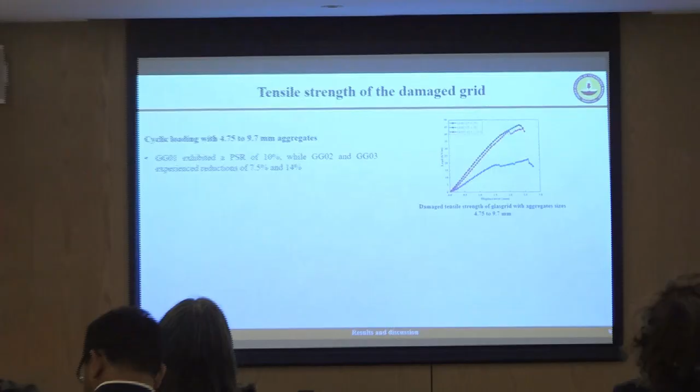It signifies that once the cyclic loading is completed with different ranges of aggregate, we have quantified its tensile strength. As I have already said, we are using three different ranges of aggregate for three different grids. In the first set of experiments, we used smaller aggregate having a size of 4.75 to 9.7 mm. We noticed that for the GG1 grid, the percentage strength reduction was 10%, while for GG2 and GG3 grids, the strength reduction was 7.5% and 14%.

In the next set of tests, we used aggregate size of 13.2 to 19 mm, and we observed that for the GG1 grid the percentage strength reduction was 18%, while for the other two grids it was 14.5% and 24%.

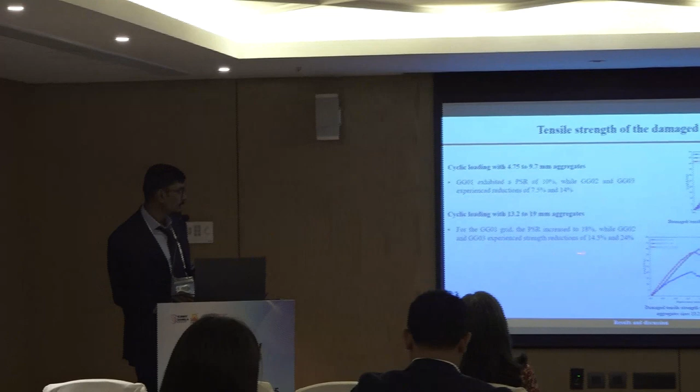Similarly, with the coarser aggregate having a size of 19 to 25 mm, we noticed that the percentage strength reduction was quite high. The percentage strength reduction for the GG1 grid was 30%, while for the other two grids it was 25.5% and 38%.

It is interesting to note that for the GG3 grid, which has a smaller aperture and higher number of yarns per unit width, in all three cases the percentage strength reduction was quite high. For instance, with this size of aggregate, the strength reduction was very high at 38%, and for the other two cases it was also significantly high. This shows that in addition to aggregate size, grid aperture does matter in terms of strength reduction. The strength reduction in the third case was quite high because the aperture size is very small, so when aggregates are used over it, they actually damage the yarns.

This shows that due to these damages, when we do the tensile test, the upper yarns which are damaged will move, resulting in reduction of tensile strength. In addition, minor damages that affect the yarns to some extent cause non-uniformity in the stress distribution. Whenever there is non-uniformity in stress distribution, the chance of distortion in the grid will be higher and the tensile strength will reduce.

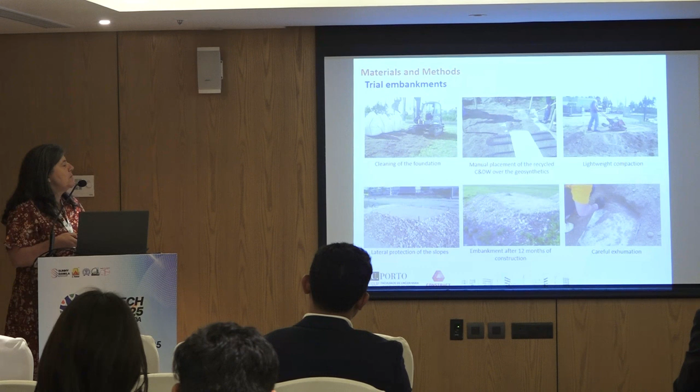After 6, 12, and 24 months of the embankment's construction, the samples were carefully exhumed to avoid any kind of additional damage. Laboratory installation damage tests were also carried out.

We used a laboratory prototype developed at our University of Porto, composed of a steel box 300 millimeters square. This box is filled with, in this case, the recycled material, and the geosynthetic is placed at the middle. Dynamic loading with amplitude ranging from 5 to 500 kilopascals at a given frequency, for 200 cycles, was induced in these materials.

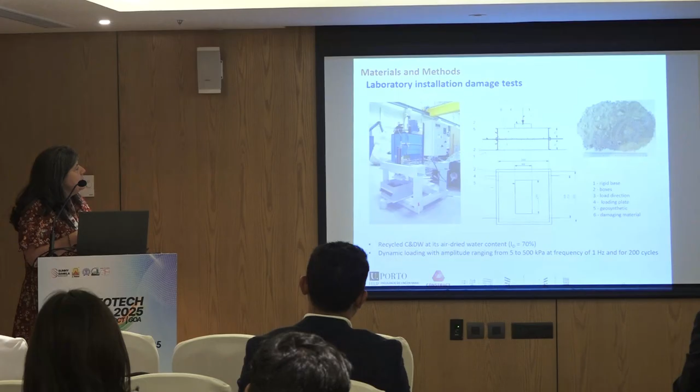Then we also performed tensile tests. The tensile tests were performed on intact specimens as supplied by the manufacturer.

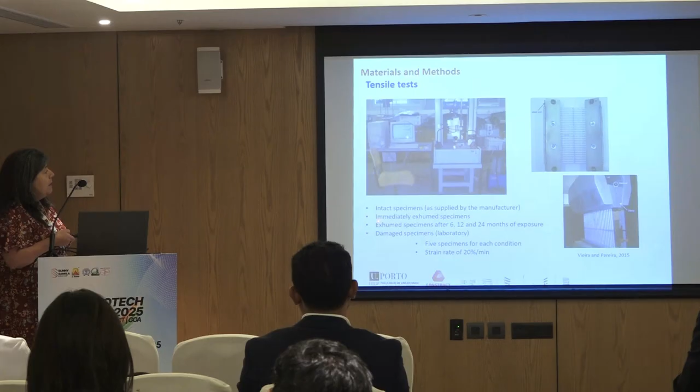We also performed tensile tests on immediately exhumed specimens to isolate the effect of the construction of the embankment from that of exposure to the fill materials. Tensile tests on specimens exhumed after 6, 12, and 24 months of exposure were also carried out, and also for damaged specimens in the laboratory. For each condition, 5 specimens were tested, at a strain rate of 20% per minute.

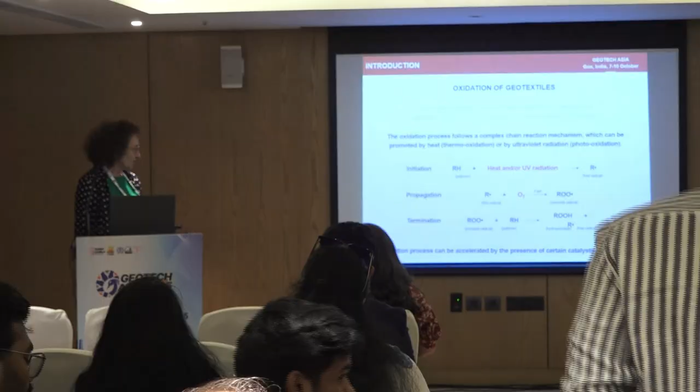My presentation is about the effect of metal ions on the thermal oxidation of geotextiles made from high density polyethylene. The oxidation of geotextiles can compromise the performance and lifespan of geosynthetics. This oxidation can be promoted by heat and by UV, and can also be accelerated by the presence of certain catalysts, such as metal ions. The main goal of this research is to study how metal ions of copper and iron affect the thermo-oxidation process of high-density polyethylene geotextile, and compare the results with those of PP geotextiles.

The experimental procedure: first we used a woven geotextile with HDPE filaments, then we degraded it with metal ions and thermo-oxidation, and finally studied the reduction in tensile strength. We took two geotextiles with similar tensile strength and deformation at rupture.

The degradation test first exposed the geotextiles, and then we made successive exposures to the two degradation tests: immersion in metal ions and thermo-oxidation. For single exposure, we used copper and iron nitrate at given concentration, temperature and time, followed by thermo-oxidation under these conditions: 150 degrees temperature, and 14, 28, and 56 days. Finally, for successive exposure: copper nitrate, iron nitrate, and thermo-oxidation.

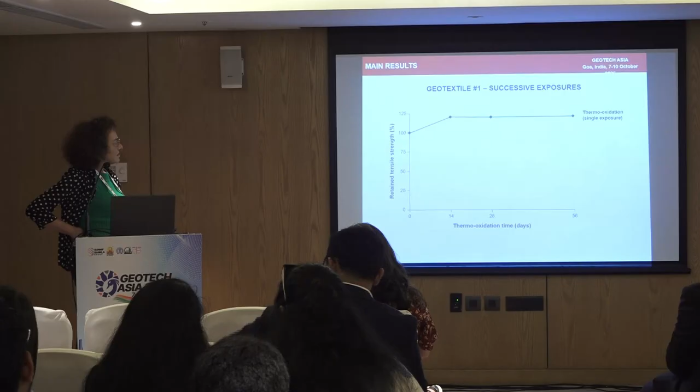In successive exposures, we see that copper nitrate had no influence on the thermo-oxidation resistance, and iron nitrate also did not influence the oxidation process of geotextile 1.

Finally, we can say that the isolated action of the metal ion solution did not result in a noticeable change in the tensile behavior of HDPE geotextiles. On the other hand, we noted change when those geotextiles were submitted to thermo-oxidation tests, which increased the tensile strength and elongation, and reduced stiffness. The successive exposure to metal ion solutions and thermo-oxidation did not cause additional change for the HDPE geotextiles.

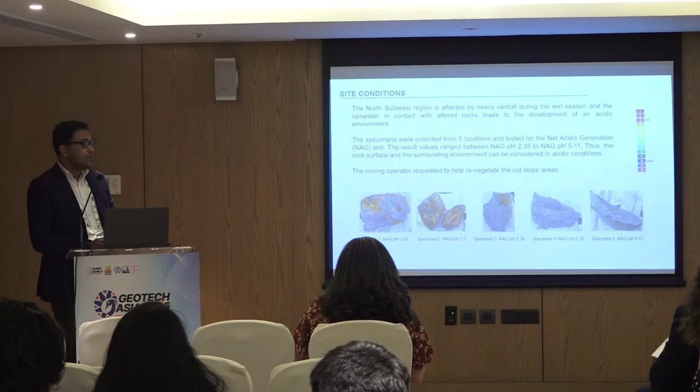So the mining operator tested the soil, taking 5 samples from the site, and tested them for net acidic generation. The results showed that the material and rock at the site had pH ranging between 2.35 to around 5. So we can say we are in quite acidic conditions, and the target was to revegetate the slope.

The steeper the slope, the higher the performance needed from the geomat placed to enhance and foster vegetation growth. In this case, we followed the Indonesian standards. We explained to the operator this is usually related to the soil terrain. However, the operator wanted to challenge the effectiveness of a solution proven throughout Indonesia, also for their mining environment.

As I mentioned, we went with a reinforced geomat because of the considered steepness of the slope, reinforced with double twisted steel wire mesh. Steel exposed to an acidic environment is prone to corrosion, so there was a requirement to provide advanced coating to the steel wire mesh for protection.

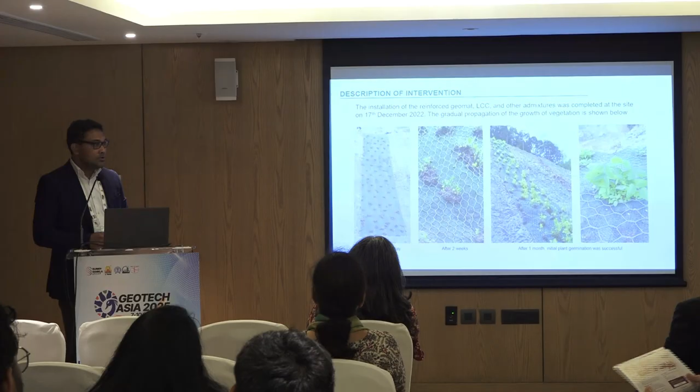We went through different laboratory tests. The first was to check for any variation in the thickness of the steel wire mesh, comparing it to the virgin, just-out-of-factory material. Based on our check, we found no difference or reduction - no red rust outside the coating - meaning there was no reduction in the thickness of the steel wire mesh.

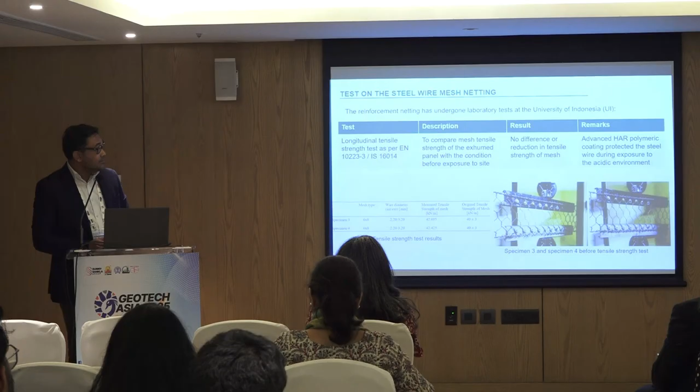Let's look at the second aspect, related to the performance of the netting, not just a single steel wire. We checked following international standards - in India there's also the Indian standard IS 16014, recently released, with an update in 2014. We checked the longitudinal tensile strength and found the results from the exhumed material in line with the values recorded for fresh material. So there is no difference or reduction in tensile strength, thanks to the coating that protected the steel wire.

To conclude - 9 minutes, right? To conclude, when we deal with challenging environments like gold mining, where infrastructure needs to be long-lasting because we're talking about people who go there, people need infrastructure that protects them and also protects the infrastructure at the mine. We need to consider long-lasting solutions in mind.

We also need to minimize the mining operations' impact. To protect the workers, we need to consider advanced coatings as I mentioned, which can also be used in collaboration with soil nailing if the slope is not stable - combining netting with soil nailing to stabilize the slope. Then there's durability - one professor earlier asked about design life, what the performance is after 30, 40, 50 years. That aspect is also definitely to be considered.

With that, I would welcome any questions from your side. Thank you.

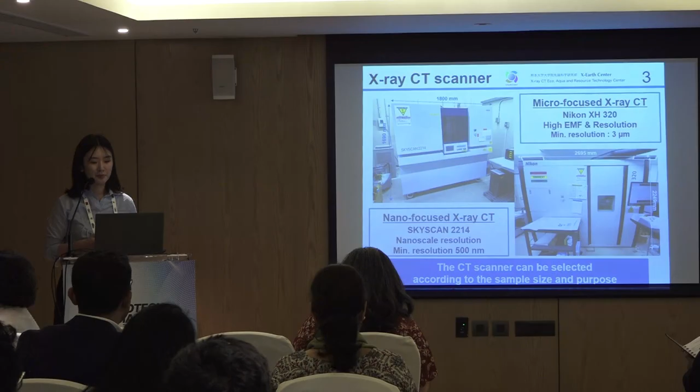Based on this background, the objective of this research is to evaluate the barrier performance of GCL by visualizing the freezing characteristic of bentonite and the microstructure changes in GCL after freeze-and-thaw using X-ray CT scanners.

In the next slide, I will introduce the X-ray CT overview and properties of our study. In this study, we separately scanned a frozen clay sample and GCL under freeze-and-thaw cycles. First, for scanning the frozen clay sample, we scanned kaolinite to clarify the freezing characteristic of bentonite. We used the freezing stage of nano X-ray CT to scan the specimen with a diameter of 6 millimeters.

Next, we scanned GCL under freeze-and-thaw cycles. Since GCL was cut into a disc with a diameter of 50 millimeters, we used micro-focused X-ray CT for the scanning.

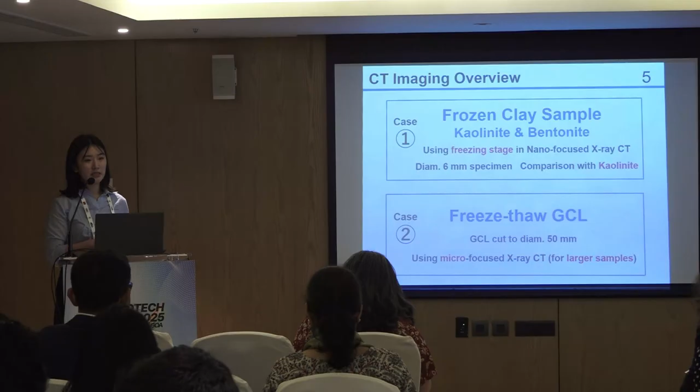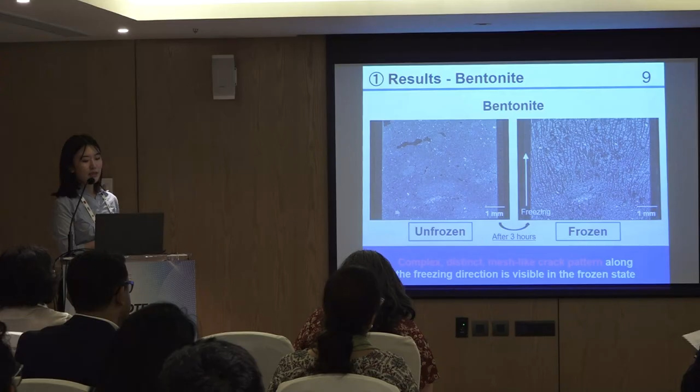Here are the results for bentonite. After freezing, bentonite showed complex mesh-like ice lenses along the vertical freezing direction, in contrast to the layered ice lens pattern observed in kaolinite.

Bentonite has high swelling and water retention properties, which are considered to be the main reason for the differences between bentonite and kaolinite when frozen. During freezing, these properties restrict the movement of water, which is necessary for ice lens formation. As a result, it can be said that complex ice lenses develop vertically within the bentonite.

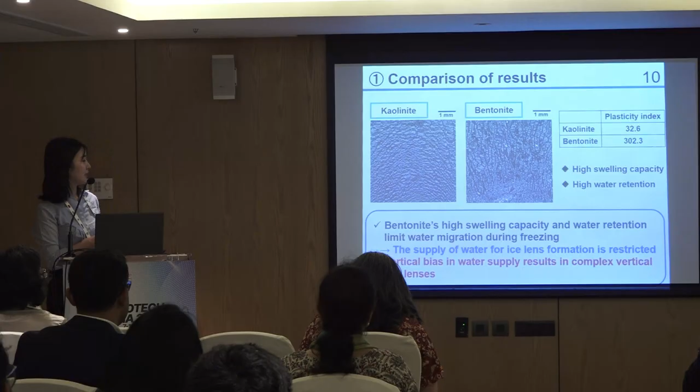Next, I'll show you case 2, the GCL under freeze-and-thaw cycles. First, I will explain the freeze-and-thaw method. Since micro CT doesn't have a freezing stage like nano CT, we developed a freezing and thawing device with thermal insulation to prevent the GCL from thawing during scanning.

Freezing was carried out at minus 16 degrees Celsius, same as in the nano CT observation, and thawing was conducted in a room maintained at 20 degrees Celsius. In our preliminary experiment, we measured the internal temperature of the GCL and found that each freezing and thawing process required about 12 hours, so we ensured at least 12 hours for both freezing and thawing process in this case.

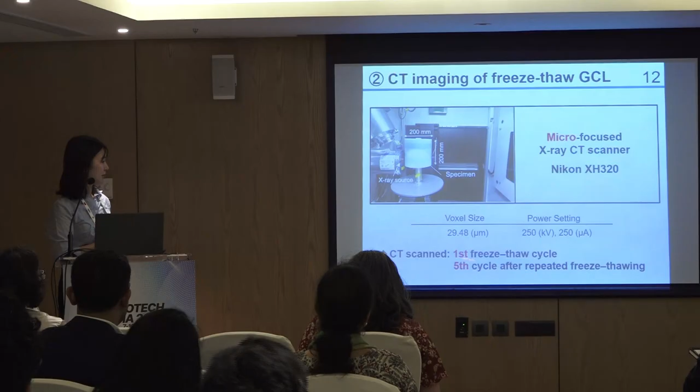These are the result images of the GCL after the first freezing and first thawing. This part is the non-woven cover geotextile, here is the woven carrier geotextile, and these are the needle punch fibers.

Here are the images after the fifth freezing and fifth thawing. From the first to fifth freezing, the frozen GCL showed a distinct ice lens pattern along the vertical freezing direction, similar to the micro X-ray CT results.

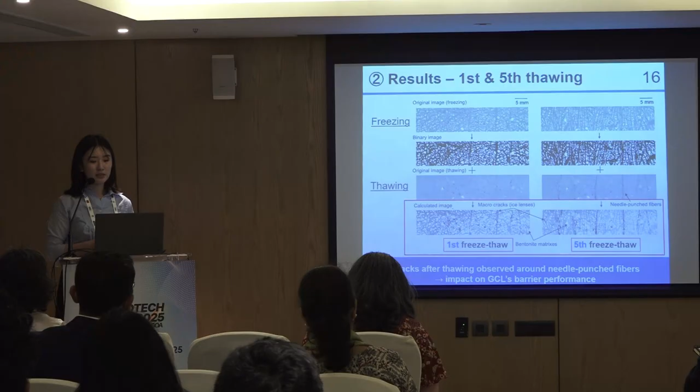Furthermore, after thawing, the cracks were clearly visible along the needle punched fibers. These cracks are expected to have a deep impact on the barrier performance of GCL.

Finally, here is the conclusion. When bentonite freezes, ice lenses develop in the vertical freezing direction. This unique characteristic of bentonite remains as vertical cracks in GCL after the freeze and thaw cycles, which could provide a pathway for fluids and other chemical solutions.

I'd like to close my presentation. Thank you so much for your attention.

Thank you, Nana, for your presentation. Any questions, please? Thank you for the presentation.

So the geotextile we use is the needle punch geotextile. If I'm not mistaken, the fibers are kind of aligned vertically after freezing. Why do you think the fibers just line up vertically like that?

Thank you so much for your question. I think needle punch is very important for the strength of GCL, but in this case, in my opinion, there are local gaps around the needle punch fiber. That's why the cracks remain. So maybe to improve this situation, we need to consider the intervals or placement of the needle punch.

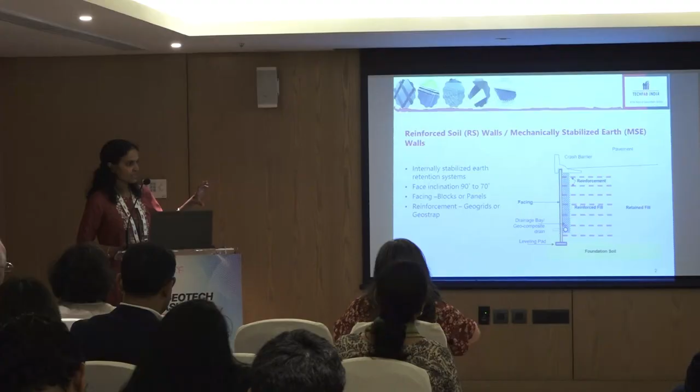While designing the reinforced wall, these are the main components we consider: there will be a reinforced zone, then the retained fill zone, and facing. The facing will be supported on a leveling pad, then the foundation on which the reinforced wall is standing, and the pavement above.

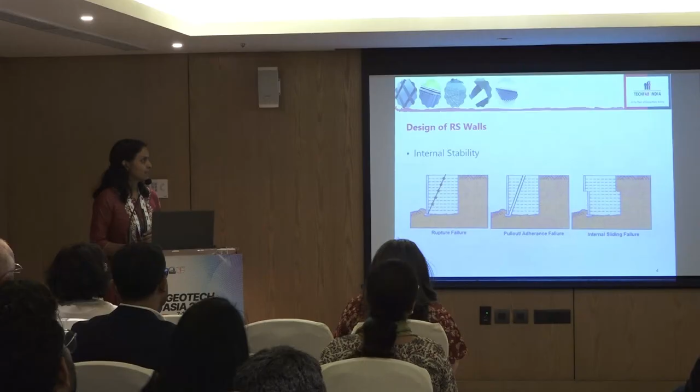While designing RS walls, we generally consider external stability and internal stability. In external stability, we consider the reinforced zone as a solid block, and we check for stability against sliding of the wall, bearing capacity of the block, overturning stability, and limiting eccentric stability. In internal stability, we check for rupture of the reinforcements, pull-out failure of the reinforcements, and also internal sliding in between the reinforcements.

There are actually two main methods currently used for designing RS walls. Up till now, we have been using the allowable stress design method, which is mainly used in AASHTO 2002 code and also IRC SP 102 code. But currently, since all other designs are moving towards load resistance factor design, also called LRFD design method, the new IS codes are also recommending LRFD method for the design of RS walls.

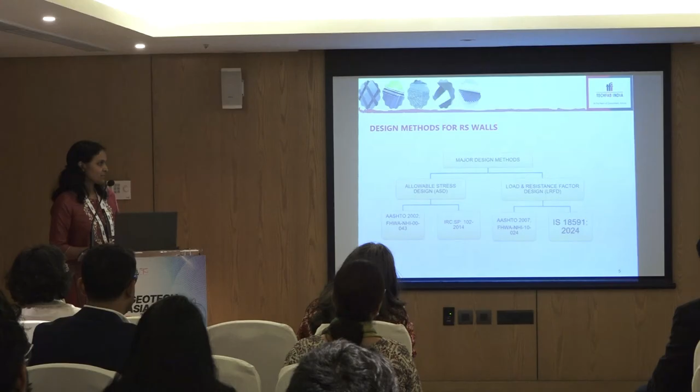So we use sheets for providing the design of RS walls. Up until now, we were using designs based on IRC guidelines, and now we are moving towards the LRFD design. I just thought of comparing both the methods using standard software. So in brief, to compare both methods: in ASD method, the allowable stress method, we check the internal and external stabilities using non-factored loads, then derive the factor of safety for each failure mode, and then design the RS walls.

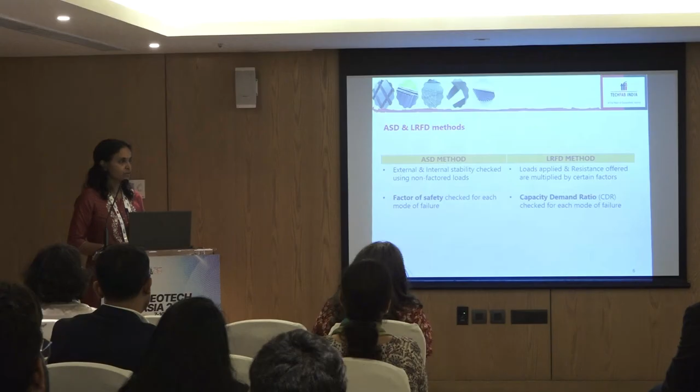In LRFD methods, the loads are increased by some factors, and the resistance offered by the soil and reinforcement are reduced by some other factors. We check a factor called capacity demand ratio, CDR, and it is ensured that for each mode of failure, the CDR value is greater than 1.

In ASD method, we use different factors of safety for sliding, bearing failure, eccentricity, and for internal stability we use factor of safety for rupture, sliding, and pull-out. Whereas in LRFD method, for each of these failure modes, we derive factored resistance versus factored load ratio, and it is ensured that this value is greater than or equal to 1.

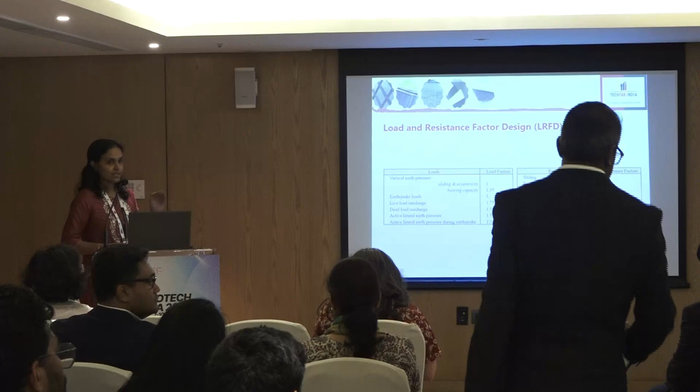I used commercial software MSEW for comparing the designs of LRFD and ASD methods. I did a parametric study for different heights of the RS walls for 2 types of arrangements: blocks and geogrid arrangement, and panel and geostrap arrangement.

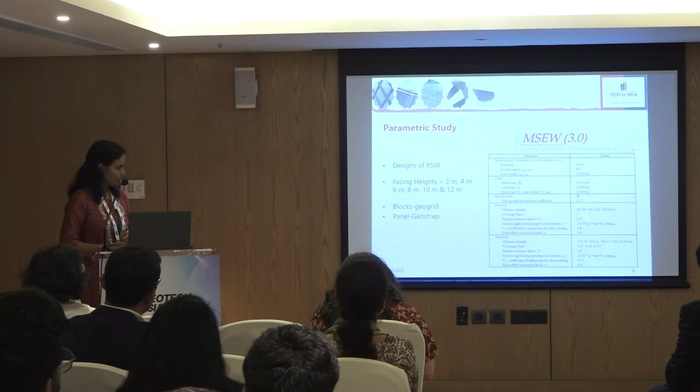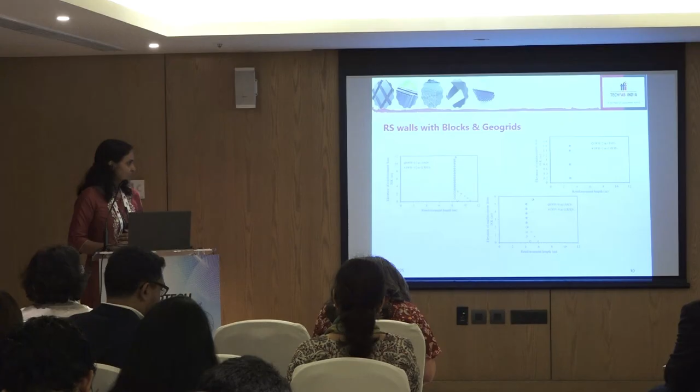This is because in block geogrid arrangement, we observed that direct sliding is more critical in failure, in internal stability. In direct sliding, in LRFD method, for lateral earth pressure we are providing a factor of 1.5, whereas for vertical load we are providing a factor of only 1.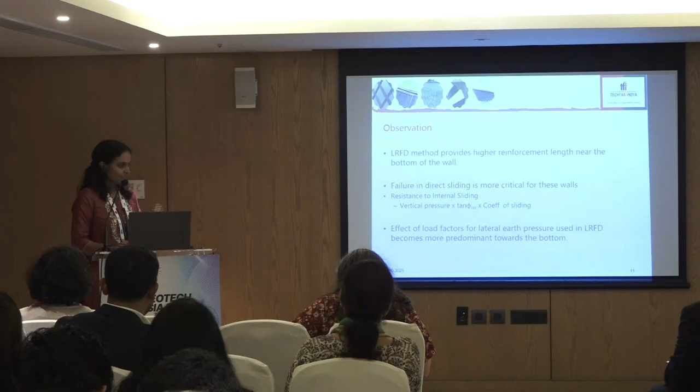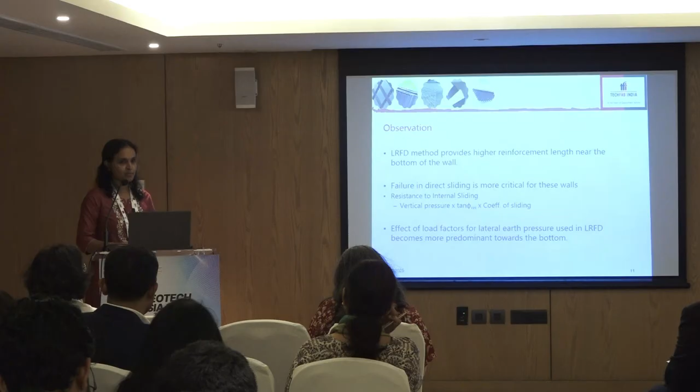Because of this, towards the bottom of the wall it becomes more critical compared to ASD method. Hence, LRFD method is demanding more length towards the bottom of the wall.

We can see that the lateral earth pressure increases with depth of the wall. In direct sliding, the vertical loads have a load factor of only 1, whereas the lateral loads are magnified by 1.5 times, whereas in ASD method we are not multiplying it by any factors. So LRFD method is demanding more length towards the bottom of the wall.

Now in panel and geostrap, we observed that for all the heights, both methods are demanding almost the same length of the reinforcement.

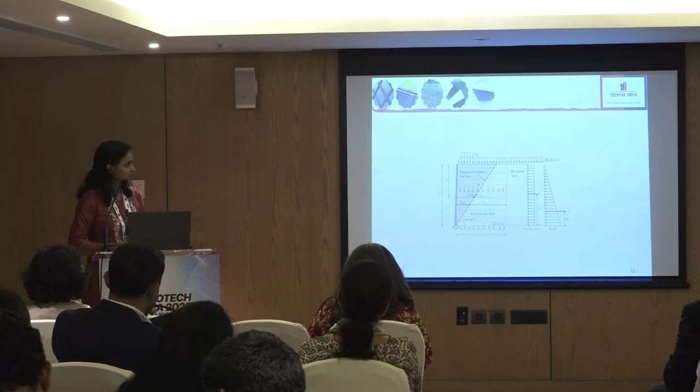This is mostly because in geostrap and panel, the most critical failure mode is pull-out failure of the strap, which is more critical towards the top of the wall, because the length of the geostrap towards the top should be higher, since for resisting the pull-out failure, we need to have only this much portion contributing to the resistance of pull-out.

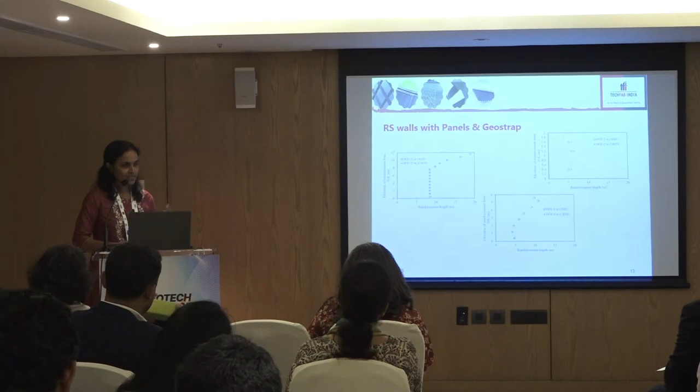Since the pull-out resistance is calculated as the vertical pressure on the reinforcement multiplied by the coverage ratio of the reinforcement and the length in the resistance zone, it is dependent on the vertical loads. Hence, there is not much difference in the results between the ASD and LRFD methods.

In summary, both ASD and LRFD methods require similar reinforcement strength. However, in geogrid block arrangement, more length is required towards the bottom of the wall in LRFD method, and in geostrap panel arrangement, similar lengths are required from both methods. That's all from me. Thank you.

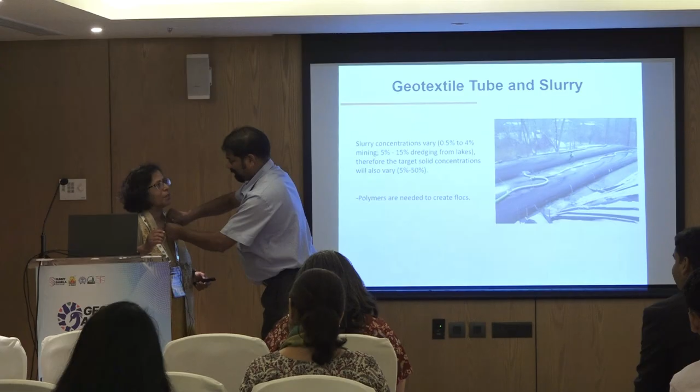To give an idea of what a geotextile tube is - it looks like a long flat sausage. They can be 100 or 200 feet long, with a diameter the size of this room, and they vary in size depending on the project's needs. Sometimes you need hundreds of tubes, sometimes just 2-3 tubes to dewater sediment.

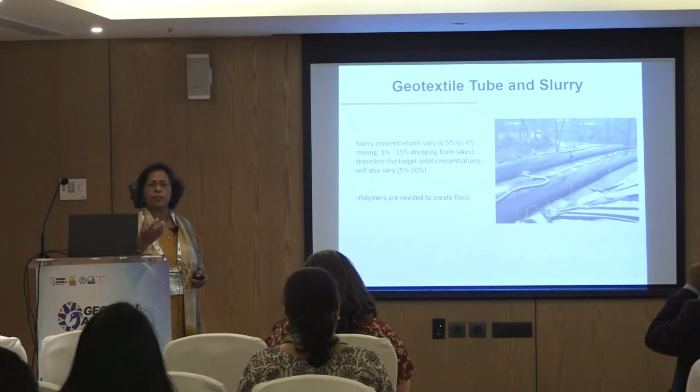Why do we need to dewater sediment? There are many applications - whether a port, a lake, or near a river - where sediments accumulate over time and need to be removed to reduce quantity. Sometimes they're taken to landfill, sometimes they can be reused. Sediments dredged from water bodies can have very small solid content, 2 or 3%, particularly in mining, and when removed from lakes, can be 5 to 15% in quantity.

For the last 15 years or so, we have been involved with industry working on many different types of sediments. In the first example, these aren't really sediments - it's a pond where a rubber or glue company has been depositing waste, with very small particles, very low specific gravity, and low solid content.

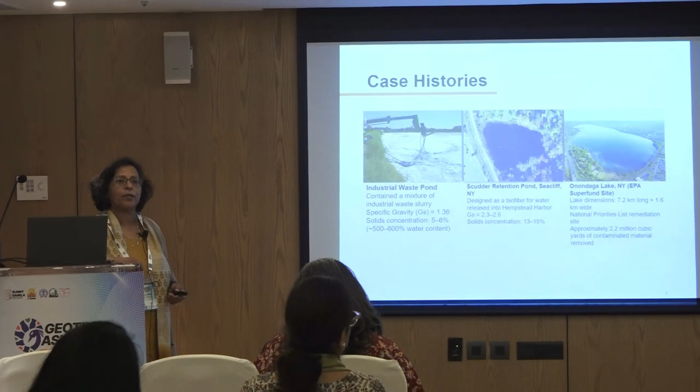In the middle you see a pond in a New York City residential area. A lot of sediment accumulated there and needed to be dredged so the water could regain its capacity, and here the sediment solid content is almost 13 to 15%.

The last example is a very large lake in Syracuse, the city where I live, where the sediments are highly contaminated and highly variable, with a lot of organic and clay content. Each project can be very different, and in practice, when removing these sediments, they generally don't perform any geotechnical testing - they just take the slurry, mix in different polymers, and try to see how they can dewater the sediments.

So we worked with a company who provided us sediments from 15 different water bodies in Canada and the US, highly variable in nature.

We combined 5 standard sediments, Ottawa sand, very fine sand, some tailings from the local area, kaolinite, and organic material, and tried to understand if the physical and chemical properties of these sediments have any relationship with the amount of dewatering we can do.

It was very ambitious because this is not generally what industry is doing. Credit goes to George and many other undergraduate students, because they did all these specific property measurements: specific gravity, grain size distribution, particle shape, organic matter, specific surface area, and chemical properties of these 20 sediments, ranging from pH to zeta potential and particle charge density. So we had a lot of physical and chemical properties to really know the nature of the materials.

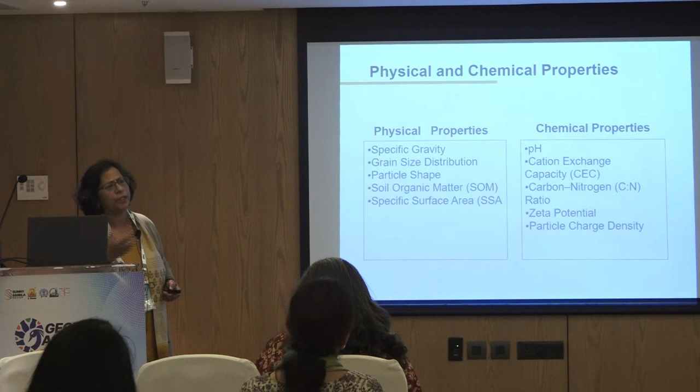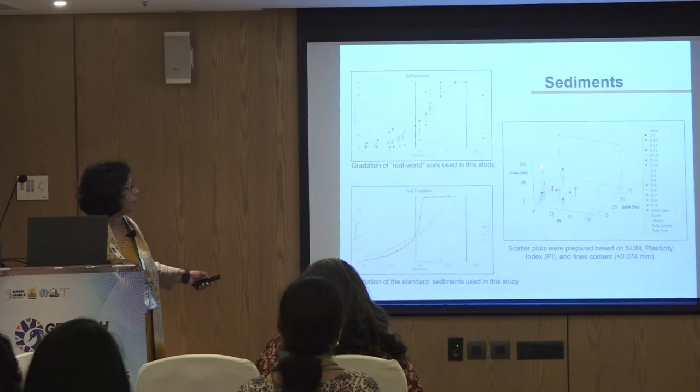Here is the range of particle size distribution - these lines may look low, but you can see they have a wide range in particle size. When we look at this chart in the middle, PI is plotted here, fine content is plotted here, and percentage of organic materials is plotted here. This is the scatter of all the sediments we are testing from many different water bodies.

Generally these sediments have a significant amount of fines, and when pumped into tubes - which are quite open, woven geotextile - they need to be flocculated, otherwise a lot of fines will come out. So in about 99% of projects, polymers are added, typically polyacrylamide, ranging from cationic to anionic. We selected a number of polymers and for each sediment found the best polymer which can make the particles lump together and flocculate. Now you have a larger particle - not a particle anymore, it's a floc - which can be retained on geotextile when we dewater.

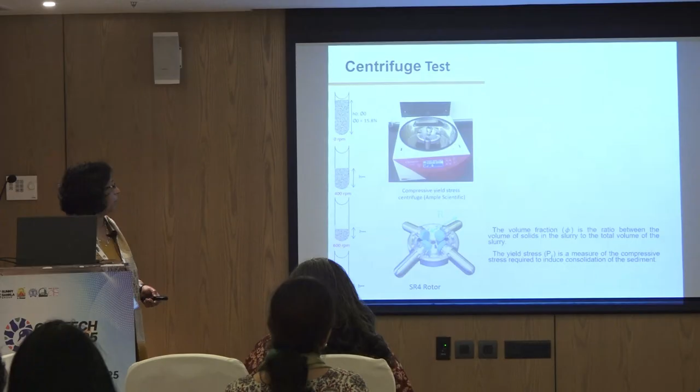One of the tests we developed over time is called the centrifuge test. This is a very standard test used in chemistry or chemical engineering, where you take a small bottle of slurry, put it in the centrifuge, and rotate it at very high frequency. Afterward, as the height decreases, the sediments are consolidating, and you measure the consolidated height. From that, we predict what the solid content will be.

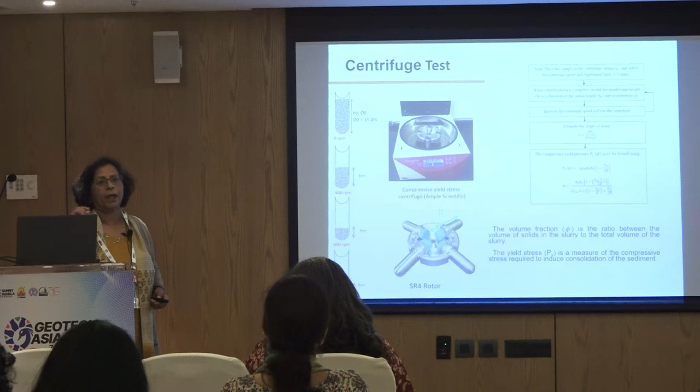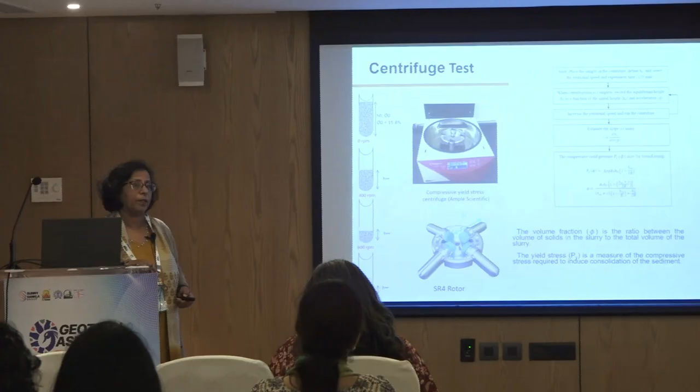Here I show results for the standard 5 soils: kaolinite, organic silt, two fine silt sediments, and Ottawa sand. You can see as particle size increases, these curves shift, meaning that after dewatering, if we start all sediments at 10% solids, sand will dewater to a very high percentage - almost 60% solids. Whereas kaolinite, after centrifuge dewatering, will only reach 35%. But we have to run the test to know that.

One important thing to look at is what we call yield stress, Py, which gives an idea of the final solid content. You can relate this Py value to the percentage solid - this is called the gel point. I'll show some data about gel point, which is what industry needs in the field, when they bid for a project and get a slurry, they need to predict what solid content will be achieved.

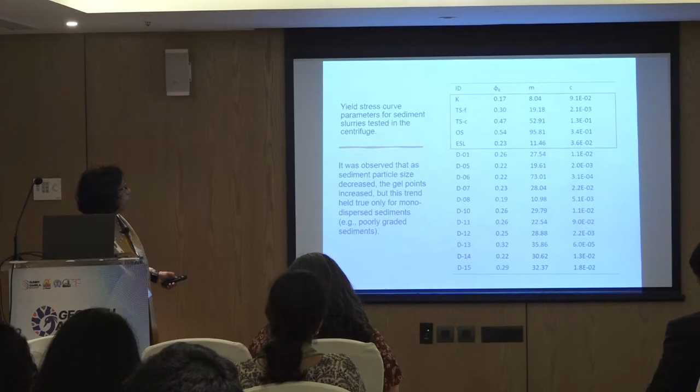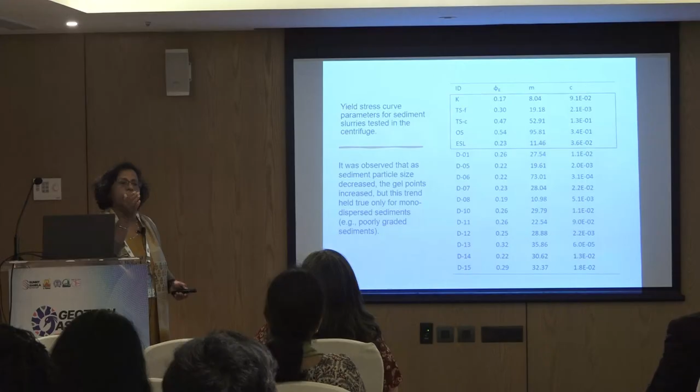Here is the test data for all these 25 or 50 sediments, where we don't even know the nature of the sediment beforehand - they vary widely. Using this equation and looking at yield stress versus slope, we make a clear observation: as the fine content in the slurry increases, the yield stress changes as a function of that. We found that the important parameters are really D10 of the solid and specific surface area, both interrelated - finer particles give us this equation, which we came up with from a large amount of data. These are measured gel points from the centrifuge test, and these are calculated values, showing a reasonably good relationship.

How can we use this? What is the value of that?

If we know the D10 grain size distribution and specific surface area, these are simple tests to perform, and using this value we can estimate what will be the gel point or percentage solid in the field without doing a large scale test.

In this test study, we measured many chemical properties, but most had no relationship with solid content. They definitely affect the type of polymer we select and the amount of polymer, but nothing to do with solid content. They were more related to the physical properties of the material or sediments.

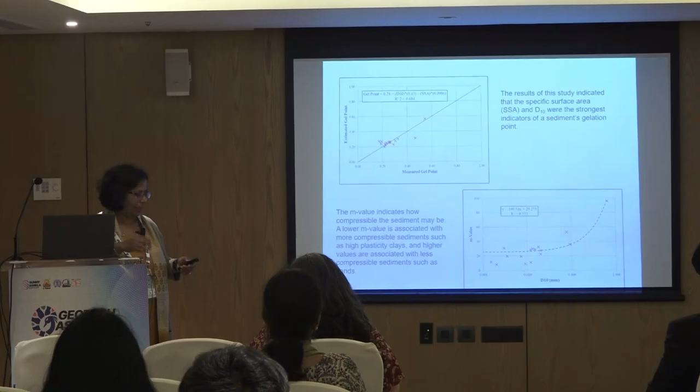So finally, the conclusion is organic matter, specific surface area, and fine content are important. We work with industry on very large projects, and they still don't measure these properties, but at least this gives an idea. Once you have sediment, you should pay attention to that, as many chemical properties had very little effect.

This conclusion is based on 20 sediments, but extensive testing was done. We were hoping we would find more relationship with chemical properties, but unfortunately we did not.

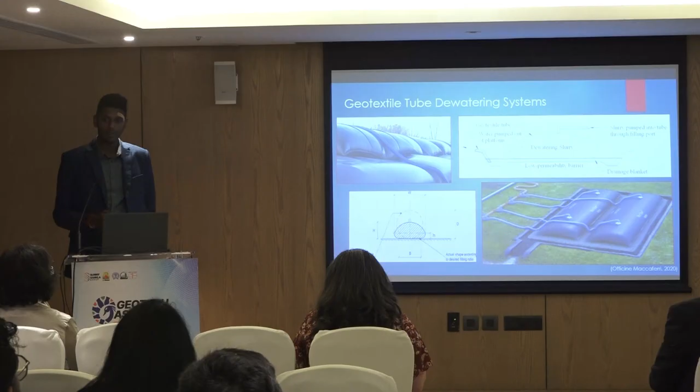So here's how they work. In the filling phase, fly ash is pumped directly into large, high-strength permeable tubes. Polymers are often added to improve particle separation and bulk up particle size. In the dewatering phase, water drains out through the fabric pores by gravity. Finally, in the consolidation phase, the material densifies into a stable, compact mass.

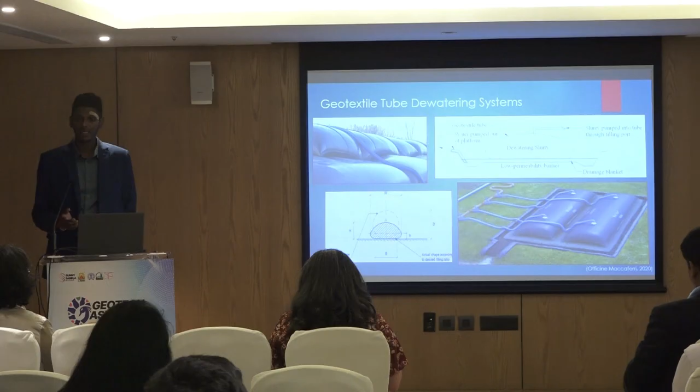So let's look at a few technical insights into this solution. Dewatering fundamentally changes fly ash. First, particle size and polymers: fines flocculate into larger aggregates, shifting the material towards well-graded silts or low plasticity fines.

Second, compaction. Dry densities of up to 1.2 to 1.6 tons per cubic meter and moisture contents between 18 and 30% make it viable for engineered fills and road sub-bases.

Third, shear strength and cohesion values. These range between 5 and 25 kilopascals, with friction angles between 18 and 30 degrees, on par with marginal soils, which allow for use in non-critical layers or confined applications.

Fourth, permeability, which is closely comparable to silts. It effectively limits leachate migration while aiding drainage control. These properties enable applications in sub-bases, lightweight embankments, blended cements (replacing up to 30% of Portland cement), and even flood defenses when integrated with geotextile tubes.

The geotextile allows water to drain while solids are trapped. To improve efficiency, polymers are added; they bind fines together into larger aggregates, improving retention and preventing clogging. Therefore, when we look at mechanisms of action, we speak about filtration and retention properties, hydraulic behavior, and the polymer conditioning involved in this solution.

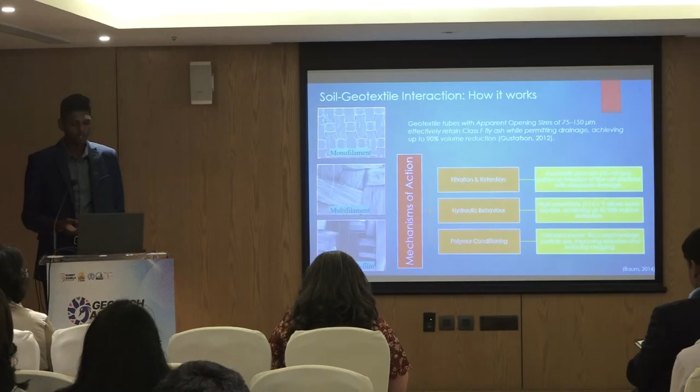Once filling starts, consolidation happens almost immediately, unlike ash ponds which can take up to decades. Stability depends on the design. Fabric resists pressure inside, friction holds stacked tubes together in place, and a prepared foundation prevents settlement or seepage. The main long-term risk is clogging, but this can be managed with the right polymers, as my previous speaker touched on. Finally, tubes must always be placed on an engineered pad with liners to stop leachate from seeping into natural grounds and meet regulatory standards.

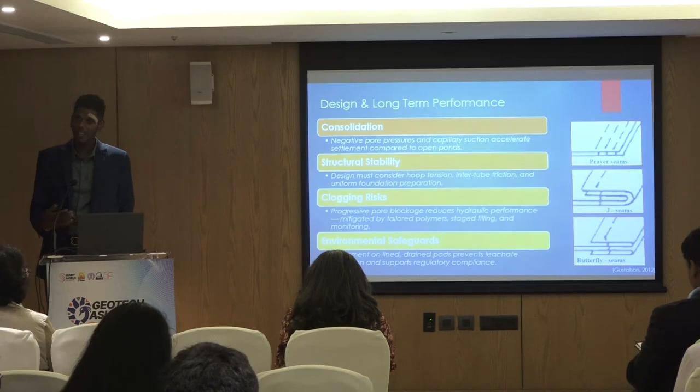Globally, fly ash is treated as a resource. Germany recycles over 60% of it into cement, roads, and embankments, while China reuses nearly 70% of it, mainly in bricks and soil stabilization. South Africa, by comparison, produces 30 million tons a year and buries over 90% of it. This study produced a roadmap for implementation, showcasing how this solution can be seamlessly integrated into tailings management systems, from lab benchmarking to pilot demonstrations.

So geotextile tube dewatering is more than just engineering - it's sustainability in action, reducing risks, recovering resources, and creating economic value. It directly advances the SDGs by turning waste into an opportunity and shifting us from containment to transformation.

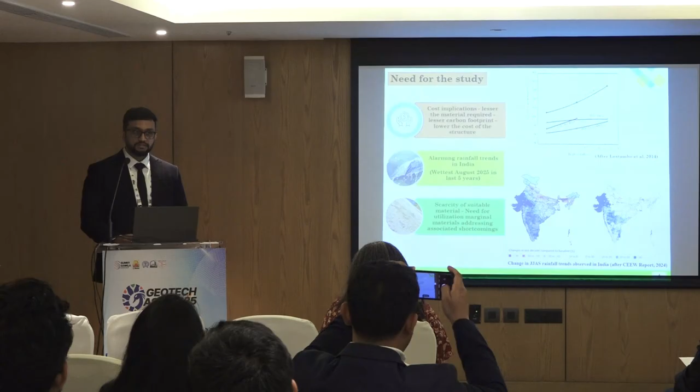The second point is the alarming trends of rainfall. If you observed, this August 2025 was the wettest August in the past 5 years, so rainfall trends seem to be changing. Comparing with the prediction from the last decade, there is a 30% increase in rainfall.

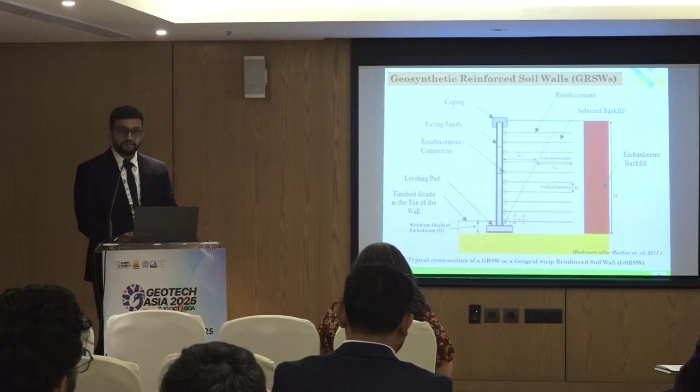One of the co-presenters has already discussed an RE wall in detail. I won't discuss much about it, but in short there are three important components of an RE wall: the fascia, the reinforcing element, and the reinforced fill or backfill. When talking about the reinforcing element, strips or strip reinforcement, we need to discuss the coverage ratio.

The relation between coverage ratio - the width of the strip to a specific horizontal spacing - has already been well established. But the recent Indian standard code has presented a different approach which is more site specific and more common to the field, where we have aspects like N and M. N is the number of connectors, and M corresponds to the number of strips coming out from a connector.

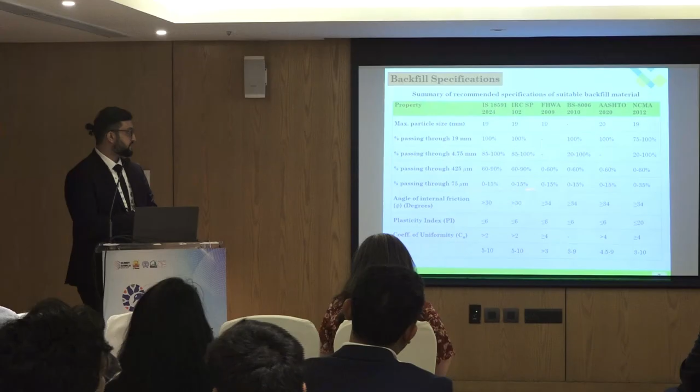So again, the three important aspects are fascia, reinforcing element, and backfill. I've just discussed the fascia and reinforcing element. These are the backfill specifications given by various codes, and in most cases our focus of interest is that fines should be 15% or less.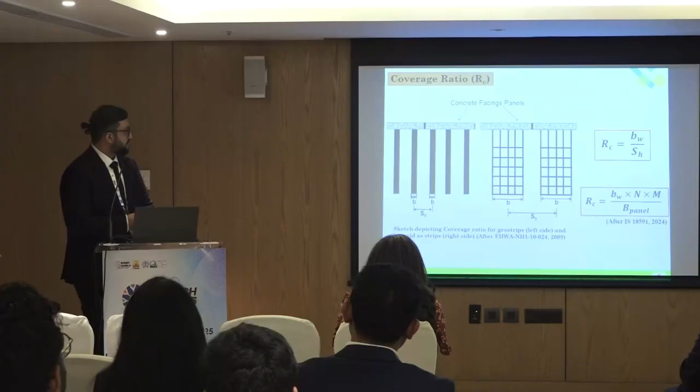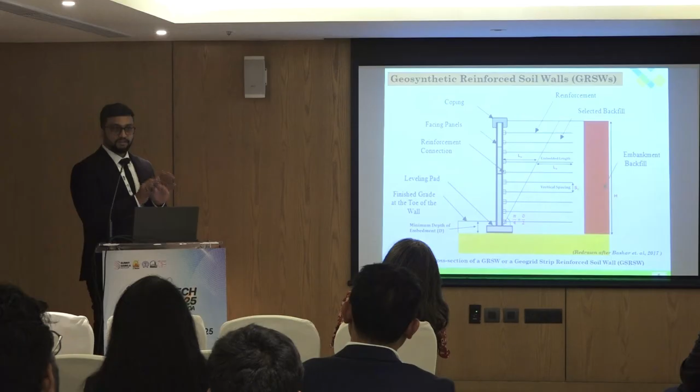One recent publication by Dasaka and Raghuram, 2024, used fly ash as backfill material, but they forgot to change the filter material - I don't know whether they forgot or just didn't update the design. There is normally a filter drainage material right behind the fascia, with a geotextile wrapping behind that, so water gets freely drained while fines remain in position. The AOS of the geotextile was not properly selected, so you could see fly ash material coming out through the spaces of the panel.

This is the National Geotechnical Centrifuge facility at IIT Bombay. Its capacity is 250 G-ton, and it's a large beam centrifuge with a radius of 4.5 meters. We can have a model area of 1 meter to 1.2 meters, or go up to 0.76 to 1.2 meters. Coming to the model test I conducted, these are the schema and specifications.

Fundamentally, when we do a centrifuge test, we need to focus on the scaling laws. We need to reduce everything in terms of a particular scaling law, whether it be rainfall, the geosynthetic material, the panel, the flexural strength of the panel, or the dimensions, everything needs to be scaled down.

It was already developed in our laboratory. Employing that, we tried to create a rainfall of 10 mm per hour, prototype rainfall. IMD says 10 mm per hour is moderate rainfall, so we tried to target that.

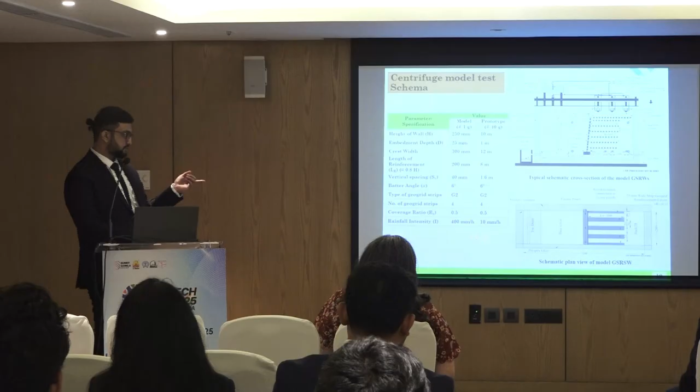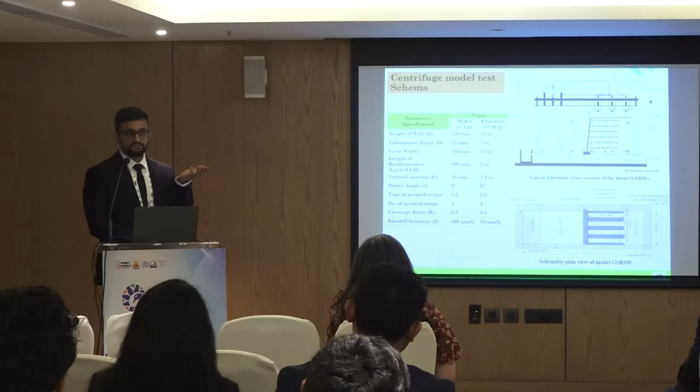Like I was saying, when we tried to find out the permeability characteristics, it's at 10 power minus 6, and the rainfall intensity is about 10 mm per hour. There is a parameter called I by Ks which defines whether the rainfall is being infiltrated or transferred into runoff. We want the effect of infiltration rather than runoff, so that's another reason we targeted 10 mm per hour.

There were previous tests done with higher intensity, but eventually most of it was runoff, it was not infiltrated into the body.

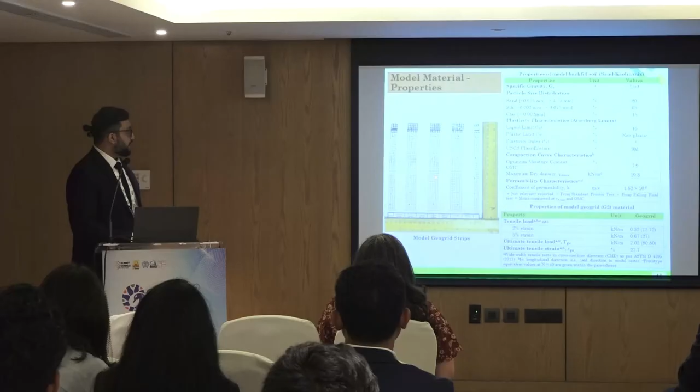To the left you can see the model geogrid strip that we procured, and we identified and made it into a strip. For all the models we have something called a stencil, so that we know the specific distance between two strips, to maintain the coverage ratio.

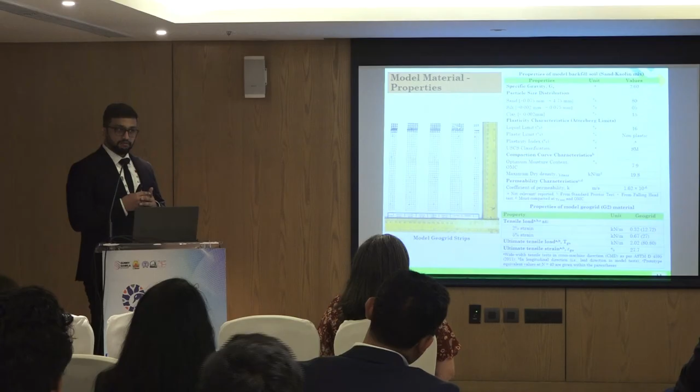Whenever this coverage ratio aspect comes, it is always center to center. If it is geogrid, full reinforcement, then it can be different. But in this case, the edge strips should be half.

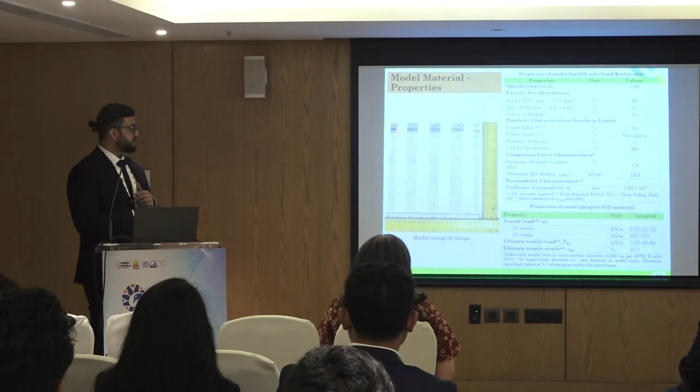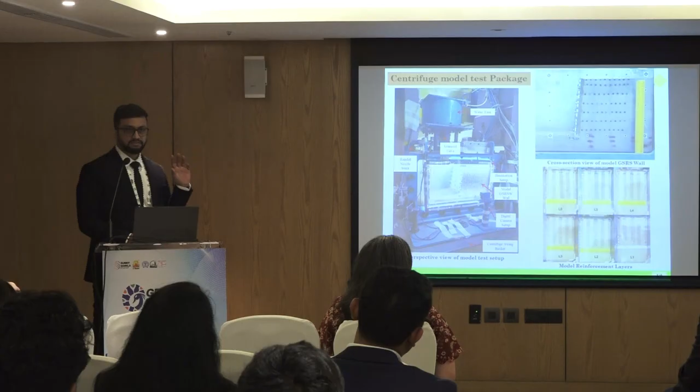In addition, we capture photographs at regular intervals, about every 5 seconds, with the help of a GoPro. Using those photographs, we do the analysis afterward, which I'll be showing.

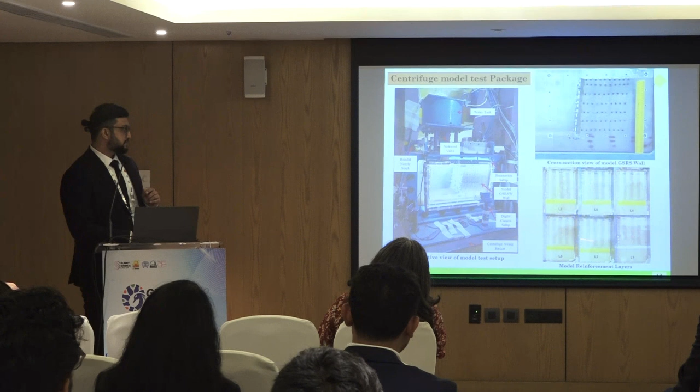This is the cross section, and this is the 6-layer orientation, 6 layers of reinforcement placed in the model. This is before, while we are compacting the model.

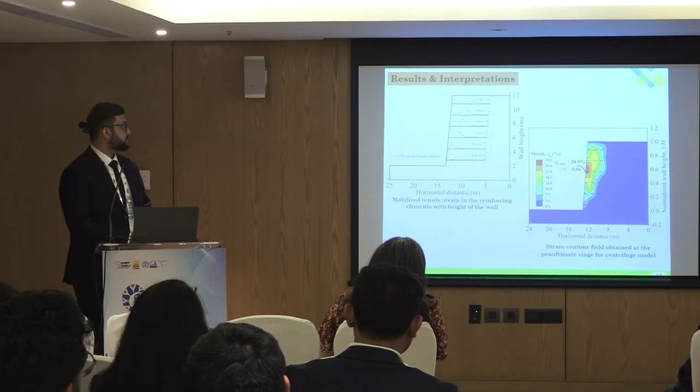Coming to the conclusions, the wall that we tested for 0.5 coverage ratio failed at 10.24 days of rainfall. The coverage ratio we usually select in the field starts around 0.45 and goes up to 0.7 or 0.8. But the lower bound, 0.5, is not actually sufficient for a rainfall of 10 mm or not more than 10 days.

So we have gotten some observation results. Maybe this 0.5 coverage ratio would be suitable for a fines content less than 15%, or maybe even less. When the fines content increases, 0.5 coverage ratio would not be sufficient.

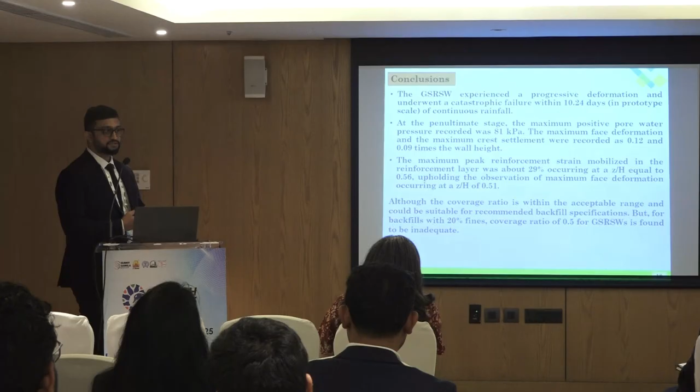After this, we did some higher coverage ratio tests as well. Soon we will be publishing that. Thank you.